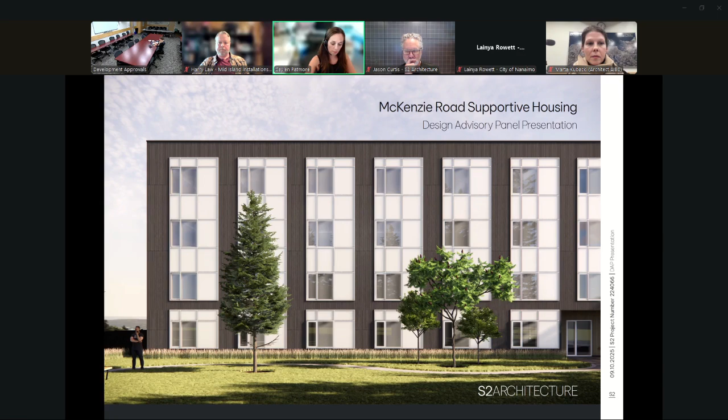Okay, can everyone see my screen? Yes. Okay, perfect. Good evening, members of the Design Advisory Panel, city staff, and all those in attendance. Thank you for the opportunity to speak tonight about a supportive housing development proposed for 1030 Old Victoria Road, also known as McKenzie Road Supportive Housing. The project aims to assist with bridging the gap of homelessness and those at risk of homelessness within the city of Nanaimo.

Getting into the context, located in the neighborhood of Chase River, our site sits adjacent to residential properties, some undeveloped vegetated land to the immediate southeast, some forested area, and commercial properties. Taking a closer look, our site is situated to the south of Petroglyph Park and is nestled between the Trans-Canada or Island Highway to the north and Old Victoria Road to the south.

In conjunction with, as was mentioned, the rezoning application, the lot has been subdivided into 2 areas. The southernmost portion is home to a temporary housing setup called Hearth, which is currently housing many of the future tenants to our proposed supportive housing development.

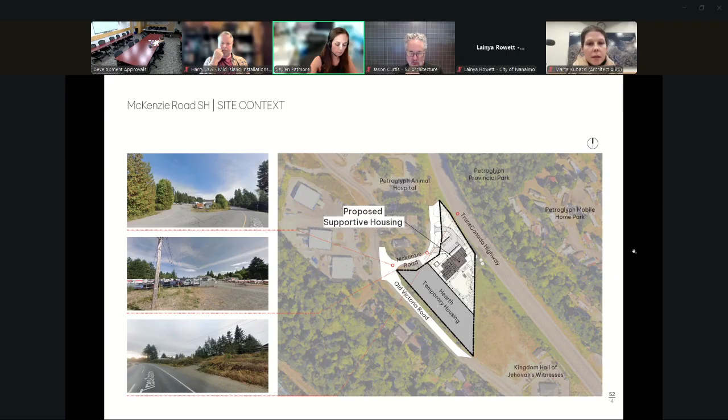The site design is largely focused on integrating the project with safety and privacy in mind. These items are addressed through the overall design, building orientation, landscape screening, and access control. Setting the building back into the site provides an inherent natural buffer from McKenzie Road and from the adjacent residences. Further, the building is oriented across the site from northeast to southwest, which utilizes the natural separation created by the placement of the building relative to the site. This placement limits the access points between the front and rear spaces and reinforces that security requirement.

The site is accessed via a 2-way drive aisle loop just off McKenzie Road, providing convenient, accessible connection to the principal entrance of the building, which also guides vehicular traffic into the surface parking area, where there are 12 parking stalls, including 2 barrier-free stalls and 4 EV stalls. Just beyond the parking are 2 loading stalls conveniently located for service vehicles, for waste and recycling pickup, as well as any deliveries for the commercial kitchen.

Design considerations for safe and distinct pedestrian and vehicular circulation are inherent to the site layout, and a widened pedestrian walkway and landscape buffers reinforce this separation. The pedestrian connection begins at McKenzie Road and follows a widened, well-lit walkway to the covered main entrance, providing a welcoming pedestrian approach.

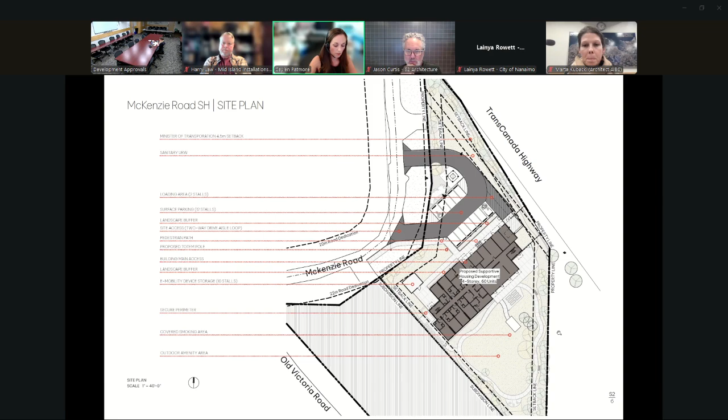The substantial outdoor amenity area to the southeast of the site is accessed via the main building entrance only, becoming an extension of the indoor common area. Our landscape architect will elaborate on this area shortly, but I'd like to get into the building design.

This project proposes 60 studio units over a 4-story traditional wood frame construction building, comprising a mix of accessible, adaptable, and standard suite types to address the unique situations of each tenant. The main floor houses all of the accessible units on the east end of the floor plate and incorporates staff spaces, building services, tenant support spaces, and amenities including a commercial kitchen, dining space, and lounge area.

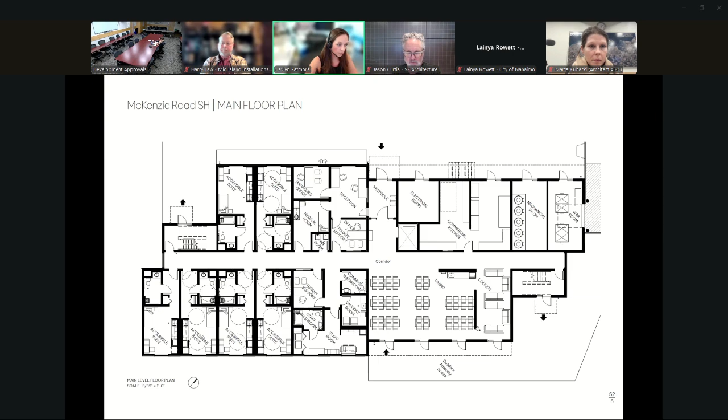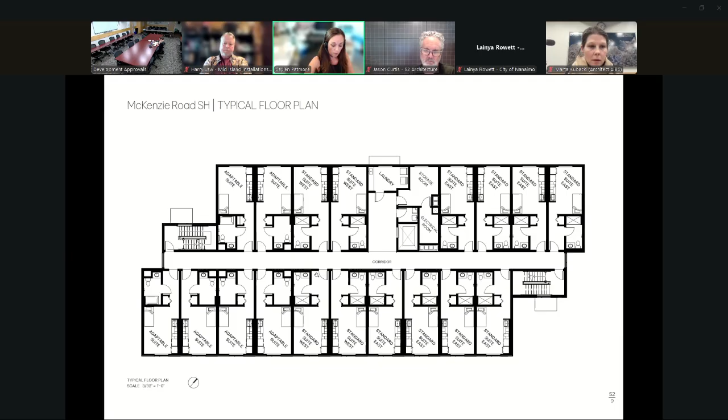The subsequent typical floors stack throughout the building, with floors 2 through 4 encompassing the remaining 54 suites, distributed fairly evenly across the floor plate from the centrally located elevator core. Each level incorporates glazing at each end of the corridor, as well as the stairwells, to bring light into the space and enhance the user experience.

Moving into character and massing: the proposed supportive housing development strives for a building character complementary to the surrounding site, weaving form and function into the proposed design. In line with the industrial designated area, a simple yet sophisticated architectural form and palette of materials was developed.

Consideration for building materials focused on wood construction, durability, and sustainability to produce a design that respects budget, code, and context. A simple palette of materials is combined with strategic repetition of elements to create texture and rhythm of visual interest.

The facade treatment continues around the entirety of the building, alternating between juxtaposing dark and light vertical wood planks, creating a dynamic, balanced facade. The white panels help emphasize the glazing and reinforce the rhythmic pattern. The wood tone material enhances the connection of the building's natural character to the surrounding natural environment.

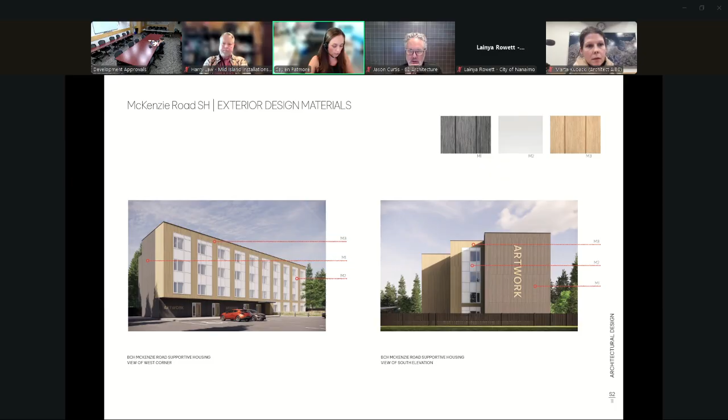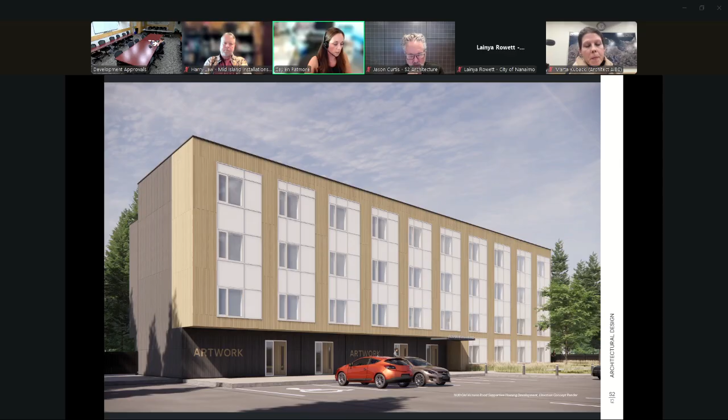Now we have a series of renderings to illustrate the design intent, pairing the building design and materials with the site design. The front of the building depicts primarily the light wood tone, which serves as a base for the rhythm of the windows, with a focus on creating a welcoming, covered, pedestrian-friendly entry condition serving as a focal point to the site and building approach.

Incorporating landscaping buffers, as seen here between the building and the walkway, reinforces the privacy required along this facade, which houses tenant suites.

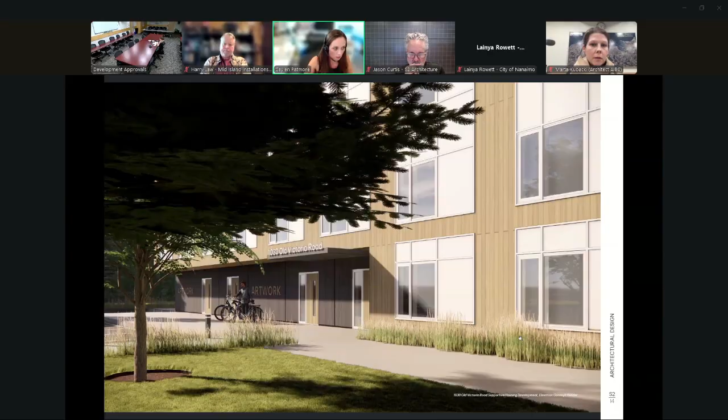Stepping back, we can see the interface between the building and the conveniently located e-mobility device storage enclosure, with its defining standing seam metal roof and perforated metal or mesh panels.

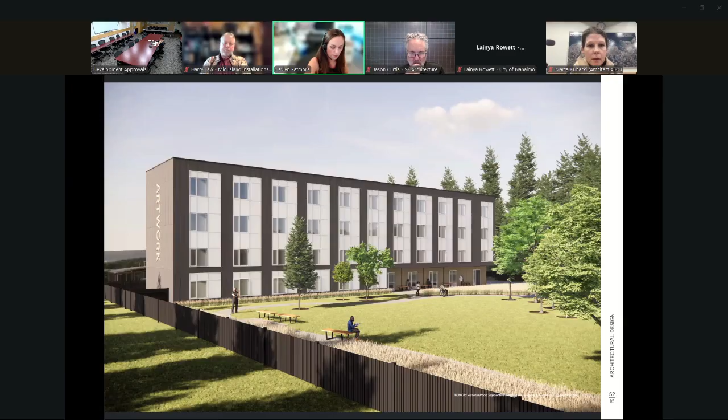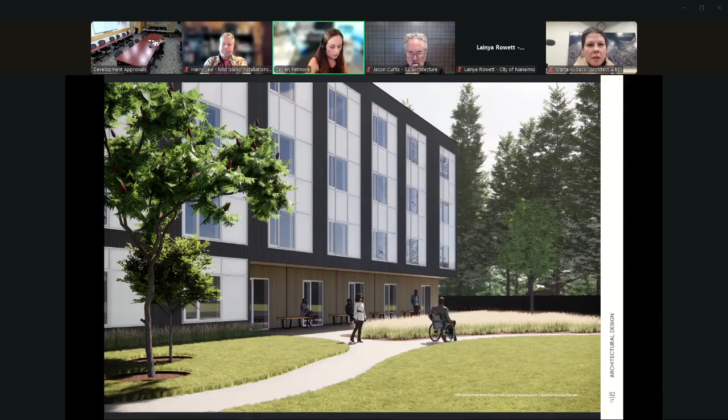Moving around to the south end of the building, to the rear amenity space, we see the dark wood tone material wrapping the building with the glazing pattern continuing all the way down the back facade. Taking a closer look, we see the overhang condition marking the access point to the outdoor amenity space, which mirrors the condition on the front of the building.

The quiet, contemporary sophistication and simplicity of the building design has been carefully considered to enhance the connection to the site, which is further reinforced by the landscape design.

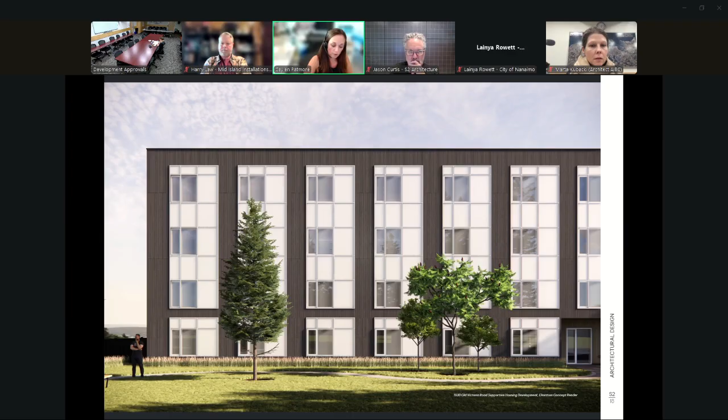With that, I would like to pass it over to Michael Patterson with Perry & Associates to discuss our landscape design. Thank you, Caylen.

Caylen, just to confirm, you're going to run through the landscape portion? I'll just tell you to switch. Is that right? Okay, absolutely, yes. Thank you, design panel. It's great to be here to present this project and the landscape.

So just to spend a little bit of time on this plan, the building is situated in such a way that we actually have quite a generous front yard and a very generous backyard. The backyard would be fully enclosed with solid fencing, and the front yard would be enclosed along the two sides, but open at the moment to McKenzie Road.

As you can see from the darker toned green, we've provided a planted buffer to provide a welcoming streetscape edge along the Mackenzie frontage. We've introduced placement of trees, trying to be mindful of fire smart requirements and placement of trees further away from the building, just for preventative reasons.

What you don't see off the plan here is to the north, the site looks towards the Petroglyph Park, and there's a beautiful treed edge that the residents look out to. We've tried to bring that forest across Number 1 Highway into the site. The trees we've used here - darker green depicts evergreen trees, and lighter green depicts deciduous trees.

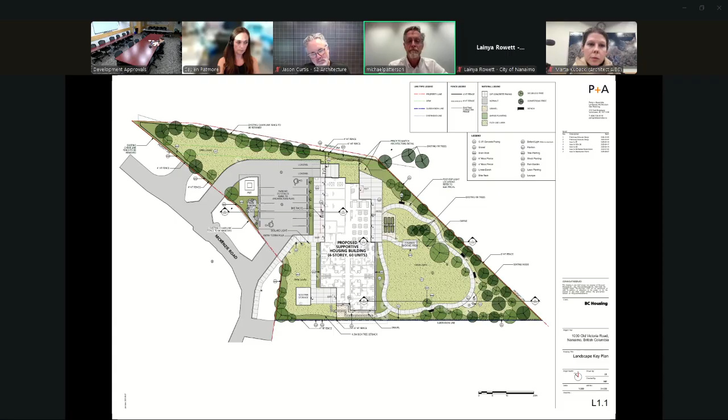For nighttime use, we've provided lighting. We've utilized post-top lighting, and we've also integrated lighting generally on the building for both the front yard and the rear yard, so that at night it's quite usable. Residents will be allowed to go out into the rear yard at different times, so we want to make sure it's well lit and secure for that use.

There are a number of existing trees - 4 existing trees - and unfortunately one of them happens to be in conflict with the building. But we are retaining 3 fairly sizable fir trees in the backyard, and we've supplemented that with additional trees.

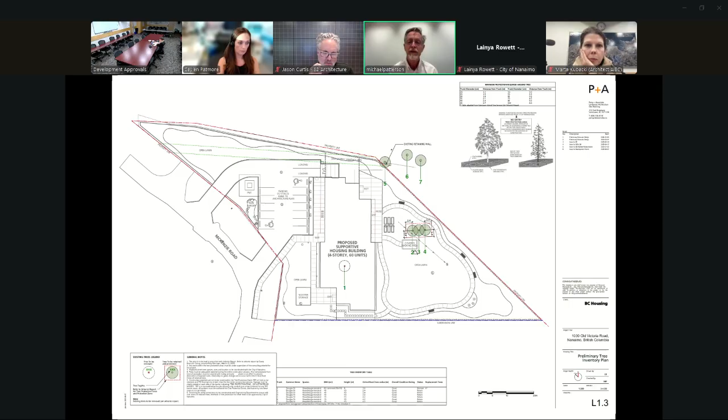Grading wise, the site is generally pretty flat. You'll see we cut a couple of sections through here. The site is flat, making for easy walking, secure walking - no pathways really even close to 5%, generally around 2% pathways, which makes for fairly safe movement around the site.

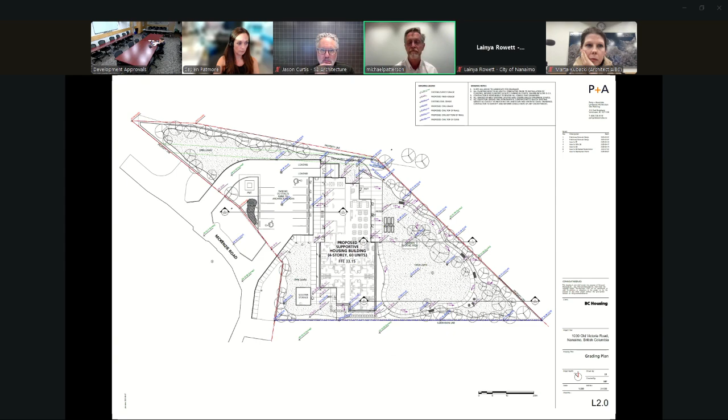Planting - we're still working on the planting. The goal here is to provide as native a plant list as possible, but also to provide some interest. Our goal would probably be to shrink the plant list down, making sure the plants provide interest through the seasons, are generally native, and certainly drought tolerant for this area.

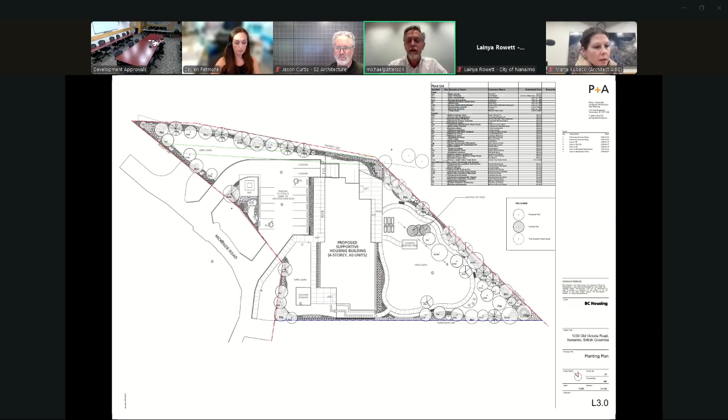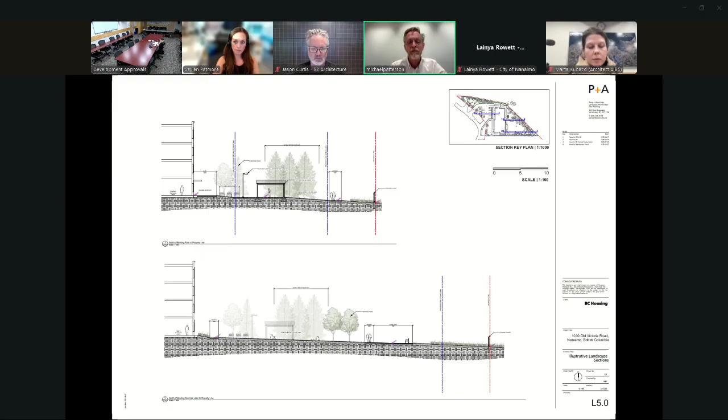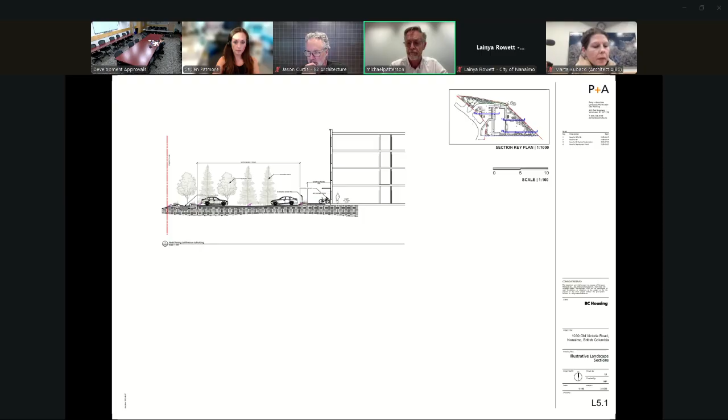Thank you, Michael, and thank you, Kaylin, for the very thoughtful and well put together presentation. I'm going to open up the panel for questions, if they have any questions for the city, for Lainya. Okay, and no one appears to have any questions. So we'll begin with the comments and questions and recommendations.

Can we start with Harry today, please? Thank you, Madam Chair, and thank you for the presentation. The landscaping's great. I really like what you've done with especially such an odd-shaped lot. That's fantastic. Form and character, I like it.

It's great. The only comment I would have is on the roof plan and your elevations, there are many exposed HVAC units, and you have your elevator overrun. In the form and character design guidelines, section 2221, they should be screened and integrated into the design of the building. So maybe you could address that somehow. Other than that, looks like a great project, and thanks very much.

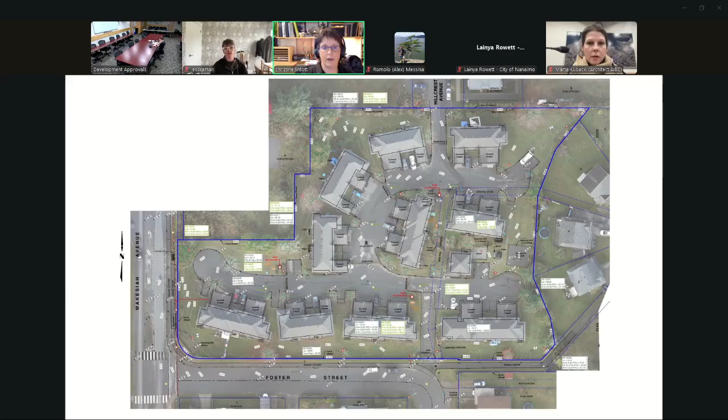The existing property, represented by this survey overlaid on an aerial, illustrates the existing 10 townhome blocks containing 34 units. The survey also highlights the surface paving leading to carports, the placement of existing trees largely located around the site perimeter, and the location of a statutory right-of-way through the site, which is a constraint I want to highlight. This contains a water main which bisects the site from the Foster-Hillcrest intersection and connects to properties to the east. Also notable is an existing bus stop along Wakesiah, just north of the Foster-Wakesiah intersection.

Okay, the proposed development replaces the existing townhouses with 160 new units with a mix of unit types in 3 buildings. Building placement along Wakesiah and Foster frontages facilitates direct firefighting access, delivery and visitor access, BC Hydro servicing access, and a prioritization of pedestrian movements into the site.

The 3 building lobbies are clustered around a tidy entry plaza, which is here, which allows short-term vehicle circulation while prioritizing pedestrian movement. Bicycle parking for residents is adjacent to the building lobbies inside, highly visible and accessible facilities which promote safety and encourage active modes of transportation.

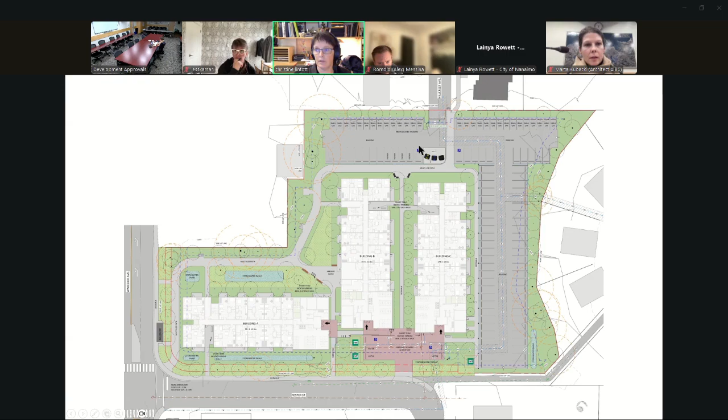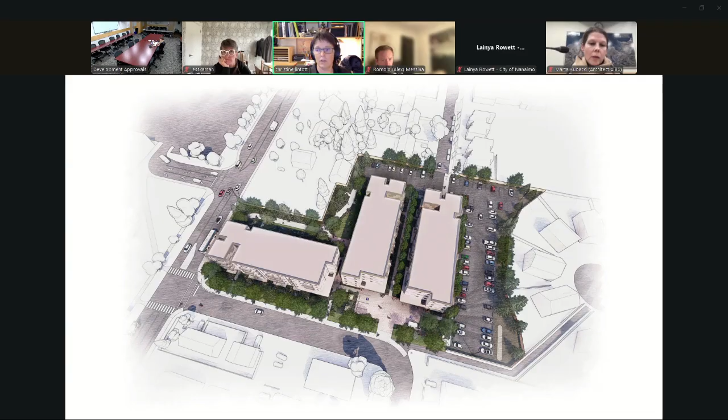This is a visualization of the approach with a view looking northwest, with Foster Street in the foreground and Wakesiah Avenue along the left, so here.

From the entry plaza, semi-public pedestrian pathways link common outdoor areas, waste facilities, and vehicle parking. These paths have been designed to allow for maximum visibility from residential units, promoting overall site safety through CPTED design principles. Vanessa's going to speak a little bit more to this.

I'm going to hand it over to Vanessa now, and just have you guide me when you want me to change the slides. Thanks, Christine.

Hi everyone, I'm Vanessa Walton. I'm the landscape architect with Lanarc, and I'm really pleased to be here this evening to share more about the landscape architectural approach on the project with you.

So I'll just start by providing a bit of an overview of our landscape site planning approach. As Christine mentioned, our planning process really included close collaboration between all of the disciplines, really thinking about the relationship of the buildings and the landscape, both on the site and the surrounding neighborhood.

One of our main goals with the site planning process was to retain as much of the existing tree canopy as possible, a lot of which you'll see is along the edges of the site. So really creating inviting site edges that buffer some of the residential properties on the west and east sides of the site, but also along Wakesiah and Foster, creating really porous, inviting edges to invite residents and the community in.

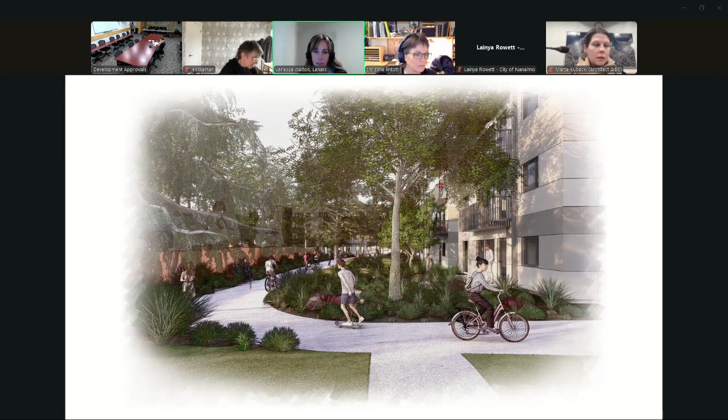Bringing you along the path, here you are on the north side of building A. There are a couple of smaller pedestrian or bike path connections leading to the main path, but this is really showing our planting approach, which is meant to be low growing, resilient, native species, with good sight lines at some of these key corners along the path.

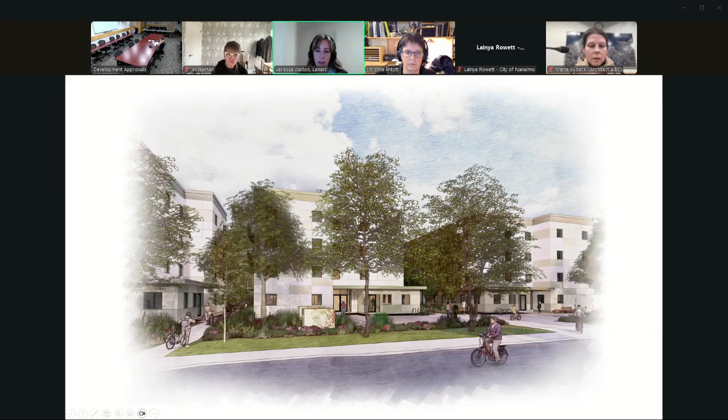On this one, we're on the south side of the development along Foster Street, giving you a look at all 3 building entries and that entry plaza. We're trying to speak to that neighborhood and edge condition of the design, with a lawn boulevard and street trees flanking the sidewalk, and the buildings wrapped with that native planting palette and a lot of trees to make it feel like a park-like setting.

On the entry plaza, looking at the pedestrian path that is public access, there's an interesting space between buildings B and C that draws you through the site and over to Hillcrest to the north. Some of the planting between the buildings is meant to feel like a green spine, and we're looking at integrating columnar tree species so residents of buildings B and C can look out to the tree canopy between the buildings.

One thing I haven't touched upon is the perimeter fencing, as I mentioned at the beginning: a 6 foot tall residential feel wooden fence, only on the edges of the site adjacent to our residential neighbors, while Wakesiah and Foster would be quite open.

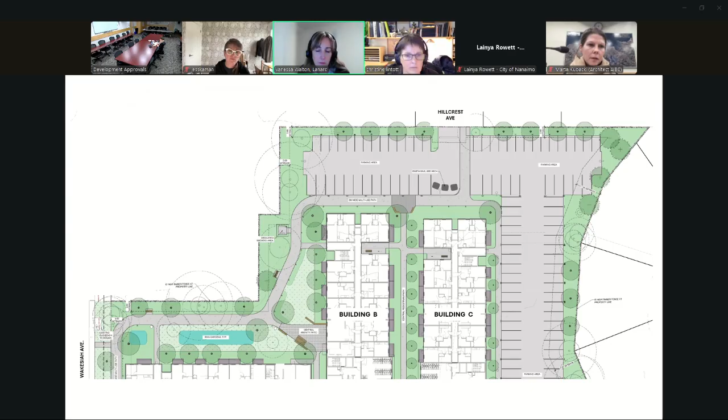I'll just mention that we've got the designated smoking area to the west of building B. It's located 6 meters away from any building windows or air intakes, and tried to be quite central to the 3 buildings, recognizing that this is a well-used space in these developments and often a place where neighbors can come together. So it's central, but also not visible from Wakesiah or from the residential neighbors.

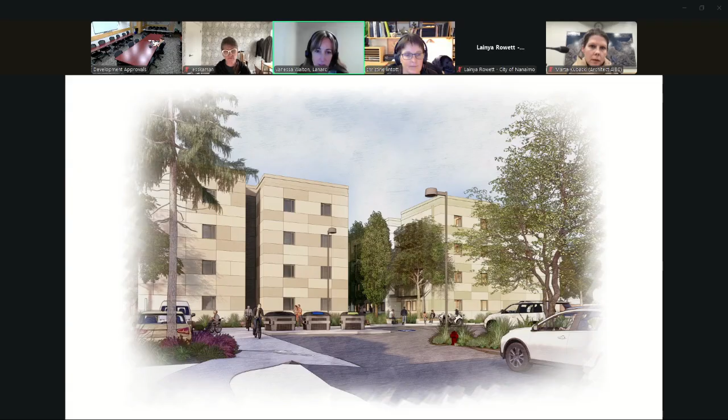One other thing I wanted to mention on the previous slide was the difference in materials coming across the parking lot. You can see that visual contrast for bikes coming through the area where there could also be vehicles traveling, so it's another cue for both modes that you're crossing through a mixing zone there.

Hopping now to the planting palette. The planting approach was really looking to retain a lot of that existing mature tree canopy, but then integrating quite a good biodiverse mix of deciduous and coniferous tree species throughout the site.

We're really looking to the planting palette to develop a sense of place, utilizing plants native to the Nanaimo area, mostly low height species for CPTED considerations, with higher shrubs only in select locations to either screen or anchor planting beds or the building.

We've used limited lawn, mostly for ecological value, looking to integrate more native planting zones and lawn in select areas where it makes sense from a use standpoint.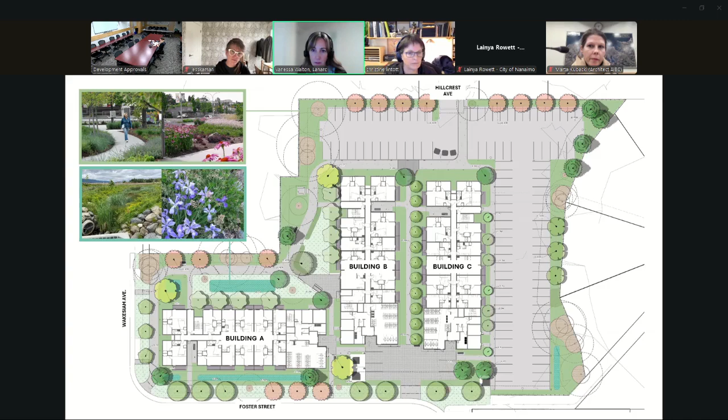Thanks. Great, thank you, Vanessa.

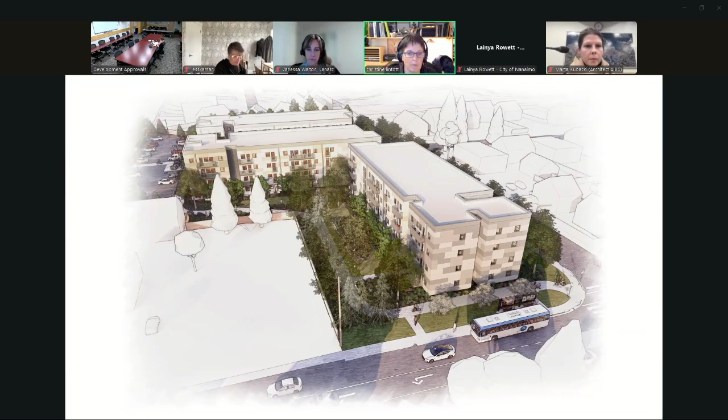Architecturally, the buildings adopt a clean, durable, and efficient design. Rather than being seen as individual buildings within the lot, they present a cohesive residential aesthetic within a park-like environment, as the buildings are nested within an urban forest. The building design addresses seismic resilience, energy performance requirements, and stringent BC Housing guidelines. These are urban residential buildings shaping the public realm, rather than object buildings that would constitute what we call landmarks, which are perhaps more suitable for public and institutional buildings.

The design uses material variation through subtle shifts in texture and color, providing visual interest without disrupting consistency in massing and detailing. The proposed use of durable materials and a modestly articulated building form affords a resilient residential architecture of clarity and timeless expression. By avoiding arbitrary articulation and an eclectic range of materials, the building is not tied to random design fads or attempts to break down the massing, with the unintended consequences of poor operational and maintainability issues.

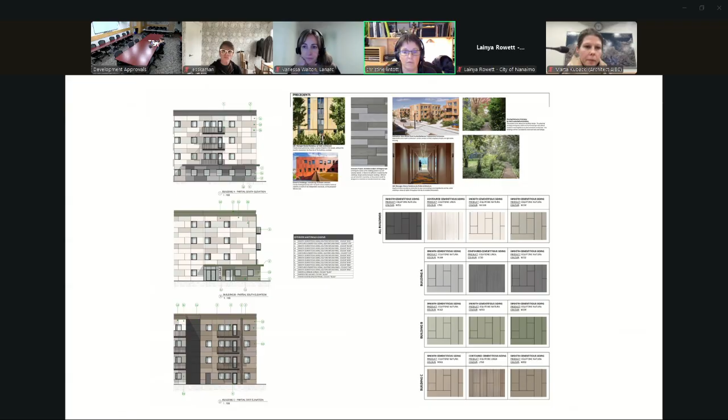These are modest, tidy, clear, and well-designed. The proposal seeks to provide a well-mannered backdrop to the landscape moves of placemaking, both for the residents and for the broader community.

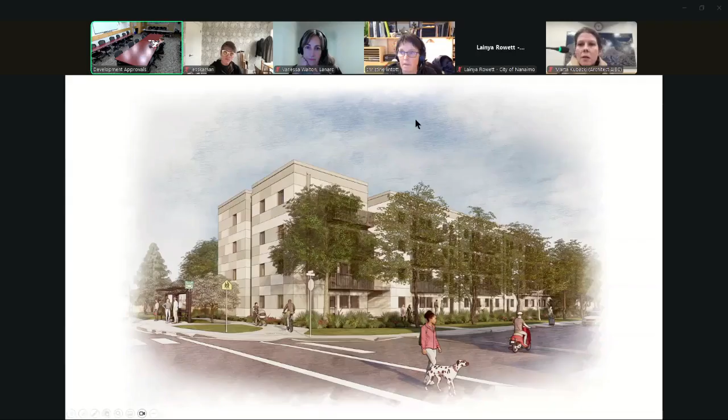Thank you for the opportunity to share the vision for the site, and we welcome any questions. Thank you, Christine, and thank you, Vanessa, for your presentation. Now, if anybody has any questions for the city, for Lainya.

Okay, I have a question for you, Lainya. We're asking here for a variance from 180 to 111 parking stalls. From what I'm seeing, it's all surface parking, and I'm wondering why there isn't any parking below the buildings, which would open up and create more open space where maybe kids can play.

Thank you, Chair. I'll attempt to answer, but the applicant may also want to respond. Obviously this is at the applicant's discretion, their target market for the occupants of the building. There may be a need, from their perspective, to maintain affordability in the design process, so there are some limiting constraints there, as well as maximizing the housing units on the site. That's how they're proposing it to be. I'm not sure if the applicant wanted to respond, but I'll pass it over to you, Chair.

Thank you for that, and that's consistent with our thinking for sure. I also want to acknowledge that Pacifica Housing, and I welcome Carolina to chime in here, has done an analysis of their actual use case for these kinds of buildings and these kinds of target residents. They have records, documentation, and data that really tell them what that ultimate parking-to-unit ratio needs to be. So we're striking that sweet spot, not over-parking the project, and really accommodating the target residents for this kind of development.